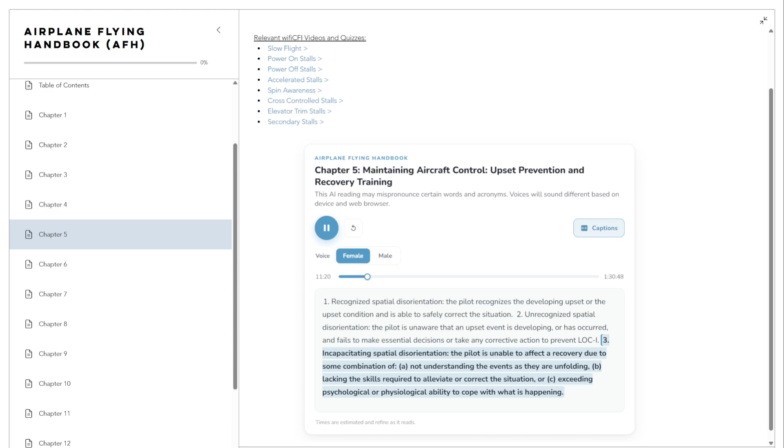3. Incapacitating spatial disorientation. The pilot is unable to effect a recovery due to some combination of a. Not understanding the events as they are unfolding, b. Lacking the skills required to alleviate or correct the situation, or c. Exceeding psychological or physiological ability to cope with what is happening.

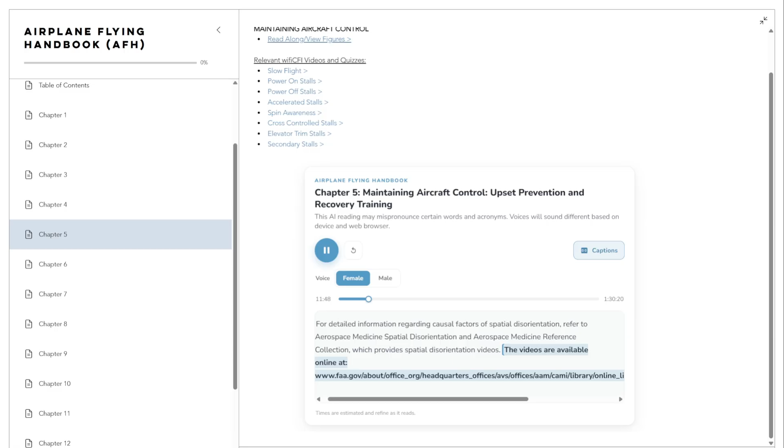Surprise is an unexpected event that violates a pilot's expectations and can affect the mental processes used to respond to the event. Startle is an uncontrollable, automatic muscle reflex, raised heart rate, blood pressure, etc., elicited by exposure to a sudden, intense event that violates a pilot's expectations. This human response to unexpected events has traditionally been underestimated or even ignored during flight training. The reality is that untrained pilots often experience a state of surprise or a startle response to an airplane upset event. Startle may or may not lead to surprise.

Pilots can protect themselves against a debilitating surprise reaction or startle response through scenario-based training, and in such training, instructors can incorporate realistic distractions to help provoke startle or surprise. To be effective, the controlled training scenarios should have a perception of risk or threat of consequences sufficient to elevate the pilot's stress levels. Such scenarios can help prepare a pilot to mitigate psychological, physiological reactions to an actual upset.

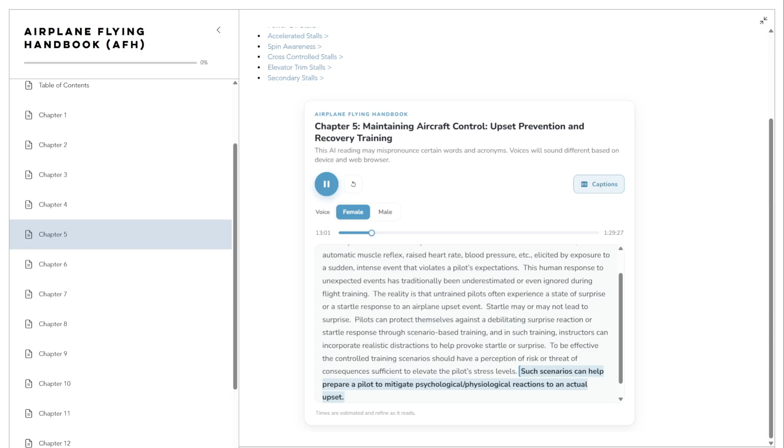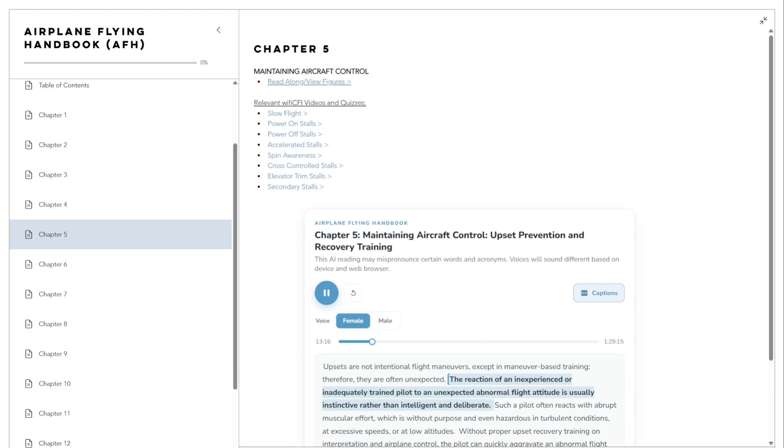Upset Prevention and Recovery Training, UPRT. Upsets are not intentional flight maneuvers, except in maneuver-based training, therefore, they are often unexpected. The reaction of an inexperienced or inadequately trained pilot to an unexpected abnormal flight attitude is usually instinctive rather than intelligent and deliberate. Such a pilot often reacts with abrupt muscular effort, which is without purpose and even hazardous in turbulent conditions, at excessive speeds, or at low altitudes.

Without proper upset recovery training on interpretation and airplane control, the pilot can quickly aggravate an abnormal flight attitude into a potentially fatal LOC-I accident. Consequently, UPRT is intended to focus education and training on the prevention of upsets, and on recovering from these events if they occur. Figure 5-1.

Upset prevention refers to pilot actions to avoid a divergence from the desired airplane state. Awareness and prevention training serve to avoid incidents. Early recognition of an upset scenario coupled with appropriate preventive action often can mitigate a situation that could otherwise escalate into a LOC-I accident. Recovery refers to pilot actions that return an airplane that is diverging in altitude, airspeed, or attitude to a desired state from a developing or fully developed upset. Recovery training serves to reduce accidents as a result of an unavoidable or inadvertently encountered upset event.

The pilot can learn to initiate a recovery to a normal flight mode immediately upon recognition of the developing upset condition. The pilot should ensure that control inputs and power adjustments applied to counter an upset are in direct proportion to the amount and rates of change of roll, yaw, and pitch, or airspeed so as to avoid overstressing the airplane unless ground contact is imminent.

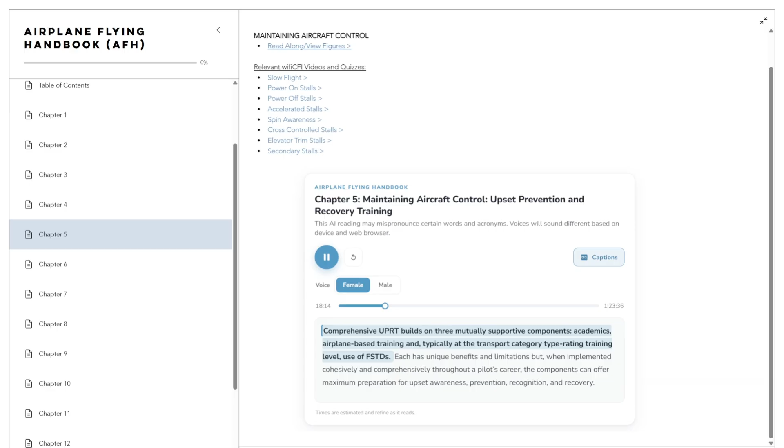Comprehensive UPRT builds on 3 mutually supportive components: academics, airplane-based training and, typically at the transport category type rating training level, use of FSTDs. Each has unique benefits and limitations but, when implemented cohesively and comprehensively throughout a pilot's career, the components can offer maximum preparation for upset awareness, prevention, recognition, and recovery.

Academic material, knowledge and risk management. Academics establish the foundation for development of situational awareness, insight, knowledge, and skills. As in practical skill development, academic preparation should move from the general to specific while emphasizing the significance of each basic concept. Although academic preparation is crucial and does offer a level of mitigation of the LOC-I threat, long-term retention of knowledge is best achieved when applied and correlated with practical hands-on experience.

The academic portion of UPRT should also address the prevention concepts surrounding aeronautical decision-making, ADM, and risk management, RM, and proportional counter-response. Prevention through ADM and risk management. This element of prevention routinely occurs in a timescale of minutes or hours, revolving around the concept of effective ADM and risk management through analysis, awareness, resource management, and interrupting the error chain through basic airmanship skills and sound judgment.

For instance, imagine a situation in which a pilot assesses conditions at an airport prior to descent and recognizes those conditions as being too severe to safely land the airplane. Using situational awareness to avert a potentially threatening flight condition is an example of prevention of a LOC-I situation through effective risk management.

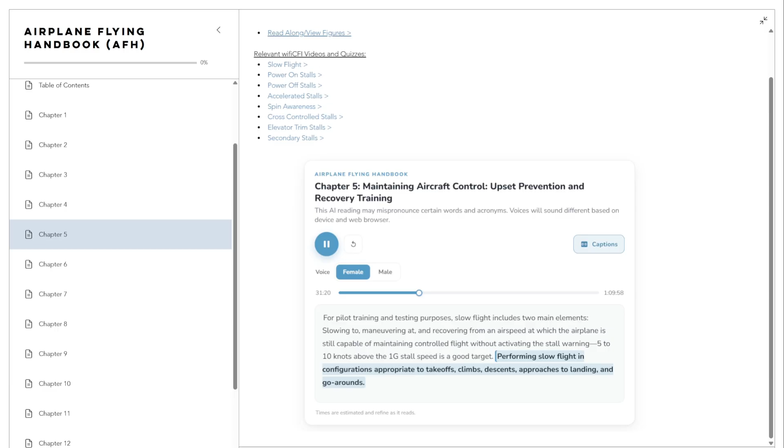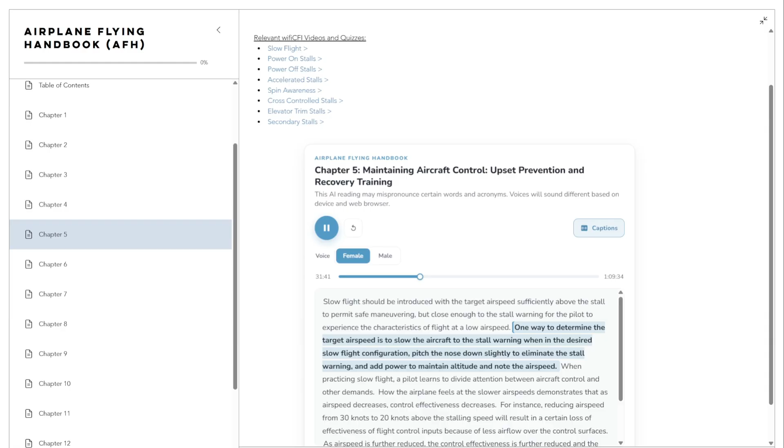Slow flight should be introduced with the target airspeed sufficiently above the stall to permit safe maneuvering, but close enough to the stall warning for the pilot to experience the characteristics of flight at a low airspeed. One way to determine the target airspeed is to slow the aircraft to the stall warning when in the desired slow flight configuration, pitch the nose down slightly to eliminate the stall warning, and add power to maintain altitude and note the airspeed. When practicing slow flight, a pilot learns to divide attention between aircraft control and other demands.

How the airplane feels at the slower airspeeds demonstrates that as airspeed decreases, control effectiveness decreases. For instance, reducing airspeed from 30 knots to 20 knots above the stalling speed will result in a certain loss of effectiveness of flight control inputs because of less airflow over the control surfaces. As airspeed is further reduced, the control effectiveness is further reduced, and the reduced airflow over the control surfaces results in larger control movements being required to create the same response. Pilots sometimes refer to the feel of this reduced effectiveness as sloppy or mushy controls.

When flying above the minimum drag speed, L/D max, more power is required to fly even faster. When flying at speeds below L/D max, more power is required to fly even slower. Since slow flight will be performed well below L/D max, the pilot should be aware that large power inputs or a reduction in AOA will be required to prevent the aircraft from decelerating.

It is important to note that when flying below L/D max or on the backside of the power curve, as the AOA increases toward the critical AOA and the airplane's speed continues to decrease, small changes in the pitch control result in disproportionately large changes in induced drag and therefore changes in airspeed. As a result, pitch becomes a more effective control of airspeed when flying below L/D max, and power is an effective control of the path.

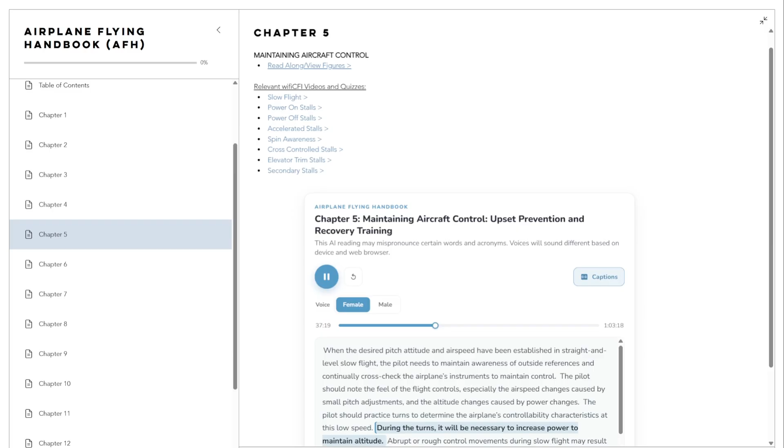The pilot should practice turns to determine the airplane's controllability characteristics at this low speed. During the turns, it will be necessary to increase power to maintain altitude. Abrupt or rough control movements during slow flight may result in a stall. For instance, abruptly raising the flaps while in slow flight can cause the plane to stall. The pilot should also practice climbs and descents by adjusting the power when stabilized in straight and level slow flight. The pilot should note the increased yawing tendency at high power settings and counter it with rudder input as needed.

To exit the slow flight maneuver, add power. As airspeed and lift increase, apply forward control pressure to reduce the AOA and maintain altitude. Maintain coordinated flight, level the wings as necessary, and return to the desired flight path.

As airspeed increases, clean up the airplane by retracting flaps and landing gear, if they were extended, and adjust trim as needed. A pilot should anticipate the changes to the AOA as the landing gear and flaps are retracted to avoid a stall.

Common errors. Common errors in the performance of slow flight are: 1. Failure to adequately clear the area. 2. Inadequate back elevator pressure as power is reduced, resulting in altitude loss. 3. Excessive back elevator pressure as power is reduced, resulting in a climb followed by rapid reduction in airspeed. 4. Insufficient right rudder to compensate for left yaw.

5. Fixation on the flight instruments. 6. Failure to anticipate changes in AOA as flaps are extended or retracted. 7. Inadequate power management. 8. Inability to adequately divide attention between airplane control and orientation. 9. Failure to properly trim the airplane. 10. Failure to respond to a stall warning.

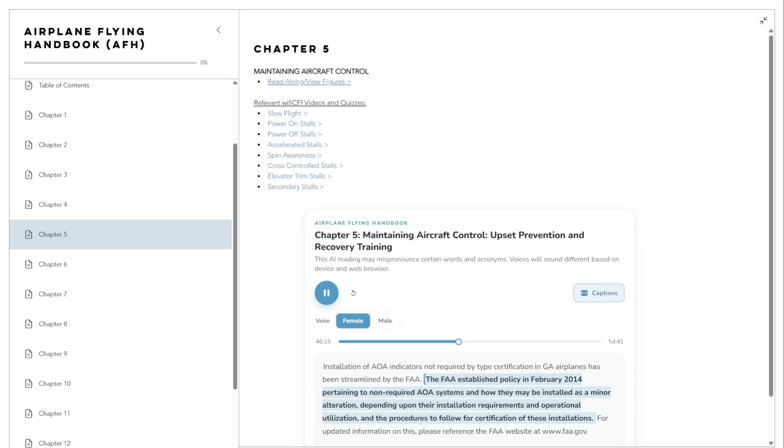Installation of AOA indicators not required by type certification in GA airplanes has been streamlined by the FAA. The FAA established policy in February 2014 pertaining to non-required AOA systems and how they may be installed as a minor alteration, depending upon their installation requirements and operational utilization, and the procedures to follow for certification of these installations. For updated information on this, please reference the FAA website at www.faa.gov.

If airplane equipment includes an angle of attack indicator, the pilot should know how the particular device determines AOA, what the display indicates, and the appropriate response to any indication. Pilots are encouraged to conduct in-flight training to see the indications throughout various maneuvers, such as slow flight, stalls, takeoffs, and landings, and to practice the appropriate responses to those indications.

It is also important to note that some items may limit the effectiveness of an AOA indicator, e.g., calibration techniques, wing contamination, unheated probes, vanes. Pilots flying an airplane equipped with an AOA indicator should refer to the pilot handbook information or contact the manufacturer for specific limitations applicable to that indicator type.

Ground and flight instructors should make every attempt to receive training from an instructor knowledgeable about AOA indicators prior to giving instruction pertaining to or in airplanes equipped with an AOA indicator. Pilot schools should incorporate training on AOA indicators in their syllabi whether their training aircraft are equipped with them or not.

Stall characteristics. Different airplane designs can result in different stall characteristics. The pilot should know the stall characteristics of the airplane being flown and the manufacturer's recommended recovery procedures. Factors that can affect the stall characteristics of an airplane include its geometry, CG, wing design, and high lift devices. Engineering design variations make it impossible to specifically describe the stall characteristics for all airplanes. However, there are enough similarities in small general aviation training type airplanes to offer broad guidelines.

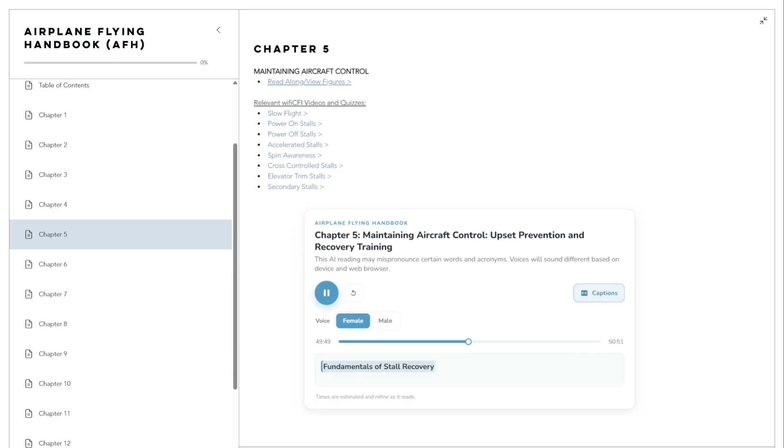Fundamentals of stall recovery. Depending on the complexity of the airplane, stall recovery could consist of as many as 6 steps. Even so, the pilot should remember the most important action to an impending stall or a full stall is to reduce the AOA. There have been numerous situations where pilots did not first reduce AOA, and instead prioritized power and maintaining altitude, which resulted in a loss of control.

This section provides a generic stall recovery procedure for light general aviation aircraft adapted from a template developed by major airplane manufacturers and can be adjusted appropriately for the aircraft used, Figure 5-10. However, a pilot should always follow the aircraft-specific manufacturer's recommended procedures if published and current. The recovery actions should be made in a procedural manner. They can be summarized in Figure 5-10. The following discussion explains each of the 6 steps.

1. Disconnect the wing leveler or autopilot, if equipped. Manual control is essential to recovery in all situations. Disconnecting this equipment should be done immediately and allow the pilot to move to the next crucial step quickly. Leaving the wing leveler or autopilot connected may result in inadvertent changes or adjustments to the flight controls or trim that may not be easily recognized or appropriate, especially during high workload situations.

2. Pitch nose down control. Reducing the AOA is crucial for all stall recoveries. Push forward on the flight controls to reduce the AOA below the critical AOA until the impending stall indications are eliminated before proceeding to the next step. B. Trim nose down pitch. If the elevator does not provide the needed response, pitch trim may be necessary. However, excessive use of pitch trim may aggravate the condition, or may result in loss of control or high structural loads.

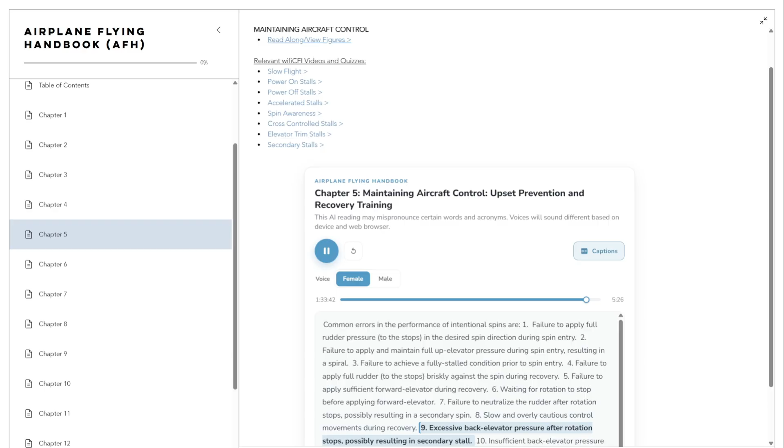6. Waiting for rotation to stop before applying forward elevator. 7. Failure to neutralize the rudder after rotation stops, possibly resulting in a secondary spin. 8. Slow and overly cautious control movements during recovery. 9. Excessive back elevator pressure after rotation stops, possibly resulting in secondary stall. 10. Insufficient back elevator pressure during recovery resulting in excessive airspeed.

Spiral dive. A spiral dive, a nose-low upset, is a descending turn during which airspeed and G-load can increase rapidly and often results from a botched turn.

In a spiral dive, the airplane is flying very tight circles, in a nearly vertical attitude and will be accelerating because it is no longer stalled. Pilots typically get into a spiral dive during an inadvertent IMC encounter, most often when the pilot relies on kinesthetic sensations rather than on the flight instruments. A pilot distracted by other sensations can easily enter a slightly nose-low, wing-low, descending turn and, at least initially, fail to recognize this error.

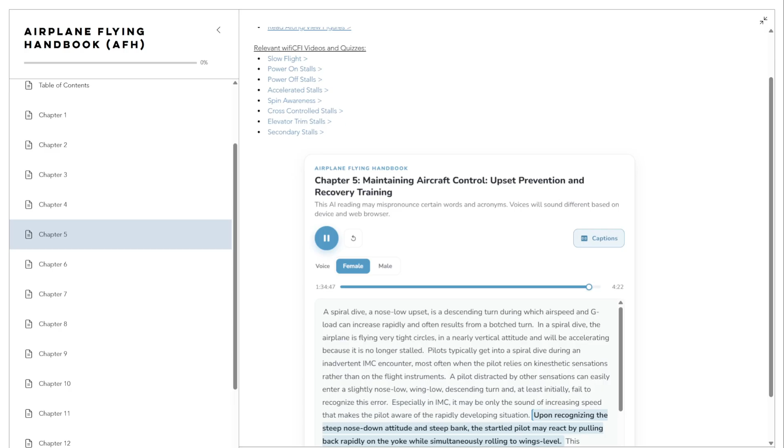Especially in IMC, it may be only the sound of increasing speed that makes the pilot aware of the rapidly developing situation. Upon recognizing the steep nose-down attitude and steep bank, the startled pilot may react by pulling back rapidly on the yoke while simultaneously rolling to wings level. This response can create aerodynamic loads capable of causing airframe structural damage and/or failure. The following discussion explains each of the 5 steps a pilot should use to recover from a spiral dive.

1. Reduce power, throttle, to idle. Immediately reduce power to idle to slow the rate of acceleration. 2. Apply some forward elevator. Prior to rolling the wings level, it is important to unload the G-load on the airplane, unload the wing. This is accomplished by applying some forward elevator pressure to return to about +1 G. Apply just enough forward elevator to ensure that you are not aggravating the spiral with aft elevator.

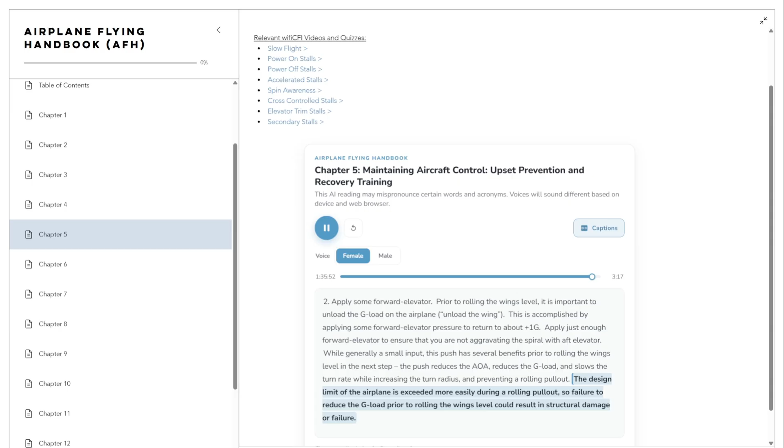While generally a small input, this push has several benefits prior to rolling the wings level in the next step. The push reduces the AOA, reduces the G-load, and slows the turn rate while increasing the turn radius, and preventing a rolling pullout. The design limit of the airplane is exceeded more easily during a rolling pullout, so failure to reduce the G-load prior to rolling the wings level could result in structural damage or failure.

3. Roll to wings level using coordinated aileron and rudder inputs. Even though the airplane is in a nose-low attitude, continue the roll until the wings are completely level again before performing step 4. 4. Gently raise the nose to level flight. It is possible that the airplane in a spiral dive might be at or even beyond VNE, never exceed speed. Therefore, control inputs are made slowly and gently at this point to prevent structural failure. Raise the nose to a climb attitude only after speed decreases to safe levels.

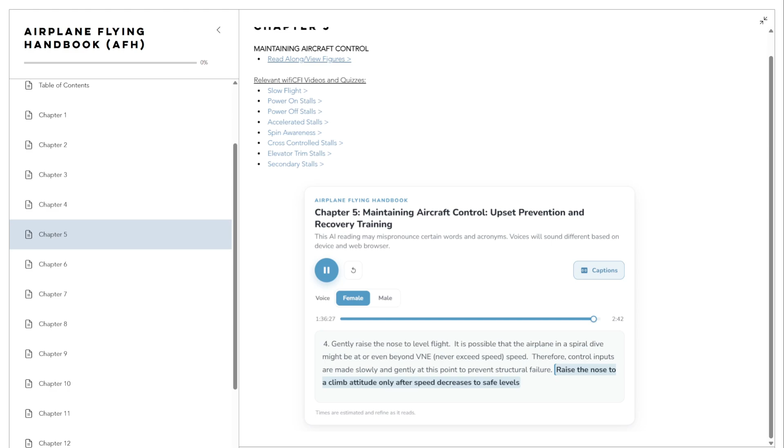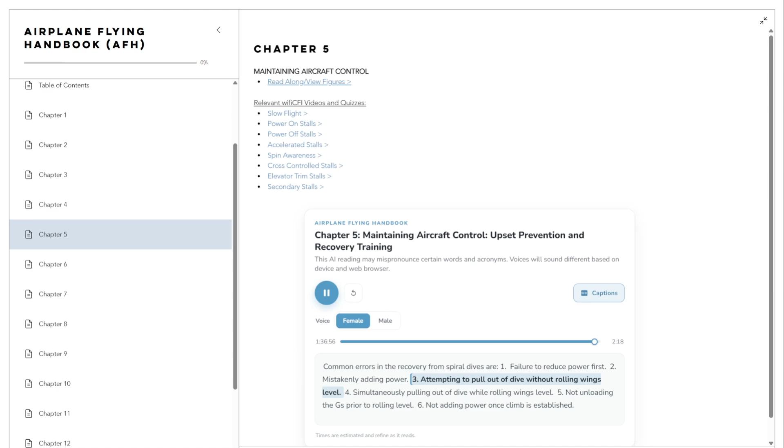5. Increase power to climb power. Once the airspeed has stabilized to Vy, apply climb power and climb back to a safe altitude. In general, spiral dive recovery procedures are summarized in Figure 5-18. Common errors. Common errors in the recovery from spiral dives are: 1. Failure to reduce power first. 2. Mistakenly adding power. 3. Attempting to pull out of dive without rolling wings level. 4. Simultaneously pulling out of dive while rolling wings level. 5. Not unloading the Gs prior to rolling level. 6. Not adding power once climb is established.

UPRT summary. A significant point to note is that UPRT skills are both complex and perishable. Repetition is needed to establish the correct mental models, and recurrent practice, training is necessary as well. The context in which UPRT procedures are introduced and implemented is also an important consideration. The pilot should clearly understand, for example, whether a particular procedure has broad applicability or is type-specific. To attain the highest levels of learning possible, the best approach starts with the broadest form of a given procedure, then narrows it down to type-specific requirements.

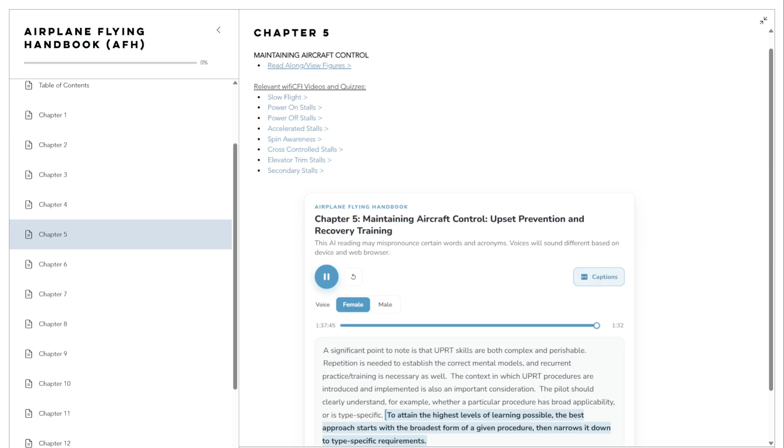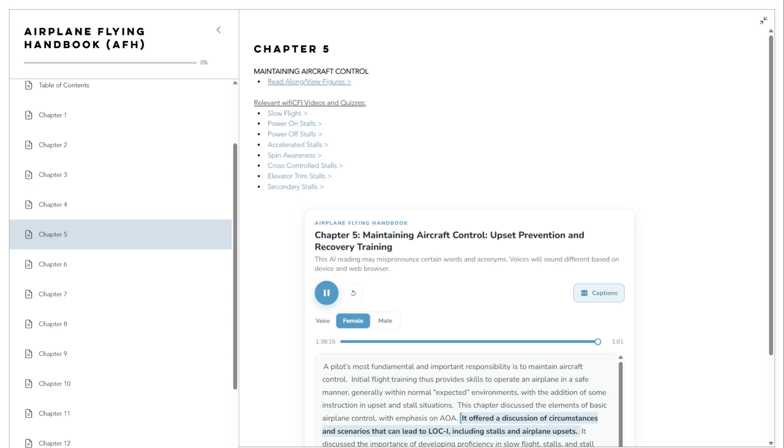Chapter summary. A pilot's most fundamental and important responsibility is to maintain aircraft control. Initial flight training thus provides skills to operate an airplane in a safe manner, generally within normal, expected environments, with the addition of some instruction in upset and stall situations. This chapter discussed the elements of basic airplane control, with emphasis on AOA. It offered a discussion of circumstances and scenarios that can lead to LOC-I, including stalls and airplane upsets. It discussed the importance of developing proficiency in slow flight, stalls and stall recoveries, spin awareness and recovery, upset prevention and recovery, and spiral dive recovery.

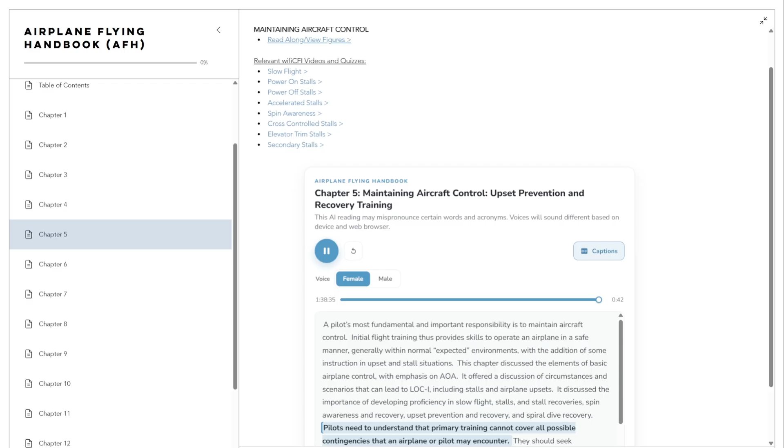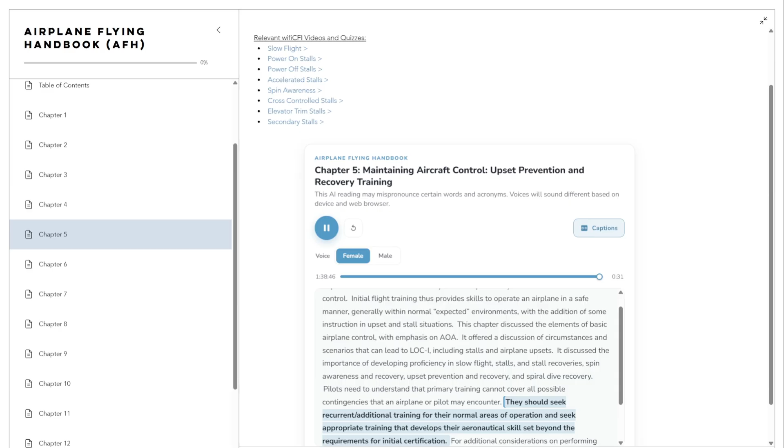Pilots need to understand that primary training cannot cover all possible contingencies that an airplane or pilot may encounter. They should seek recurrent, additional training for their normal areas of operation and seek appropriate training that develops their aeronautical skill set beyond the requirements for initial certification. For additional considerations on performing some of these maneuvers in multi-engine airplanes and turbojet-powered airplanes, refer to chapters 12 and 15, respectively. Additional Advisory Circular, AC, guidance is available at

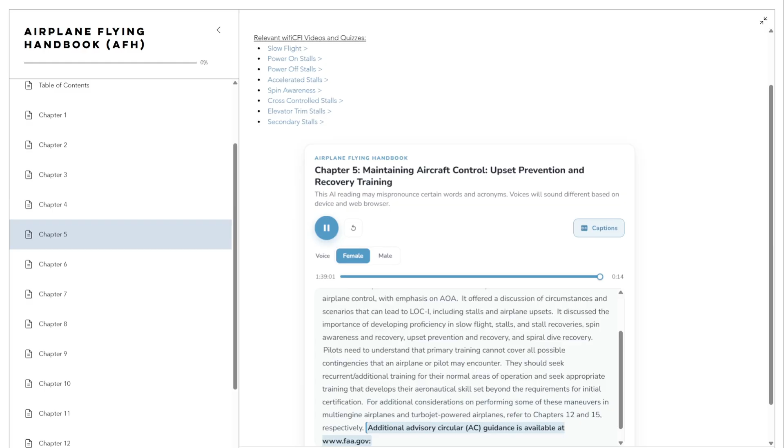www.faa.gov. 1. AC 61-67, as revised, Stall and Spin Awareness Training. 2. AC 120-109, as revised, Stall Prevention and Recovery Training, and 3. AC 120-111, as revised, Upset Prevention and Recovery Training.